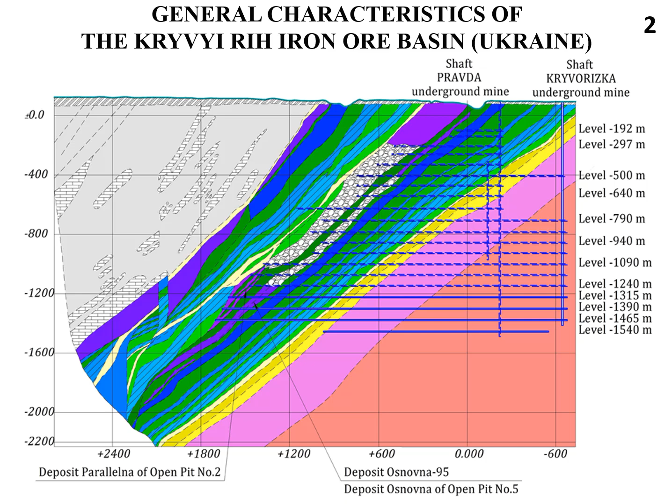Rocks of the hanging wall and footwall are represented by strong, stable martite hornfels with ultimate compression strength of 100 to 130 megapascals and goethite hematite martite hornfels with ultimate compression strength of 70 to 90 megapascals. Physical properties of rocks are given in the table. As is seen from the table, physical and mechanical properties of the rocks are wide in range.

When mining iron ore, over 60% of underground mines of Kryvyi Rih iron ore basin apply a system with the bulk caving of ore and overlying rocks. These mining systems have the following disadvantages: ore losses on the footwall, up to 30 to 50% of the total ore losses; ore dilution, by 3 to 5% more than standard; reduced content of the useful component in the mined ore mass. When the deposit dip is 45 to 60 degrees, application of these mining systems results in about 30 to 40% of ore lost on the footwall.

Increased losses of ore during mining lead to an increase in the specific volume of mining and capital works, preterm mining of levels. In this regard, the scientific and technical task of studying and enhancing the technology of mining ore deposits by the underground method for Kryvyi Rih iron ore basin in the triangle of the footwall, in the dead area, when working out ore deposits with a dip of 45 to 60 degrees to minimize ore losses, is topical.

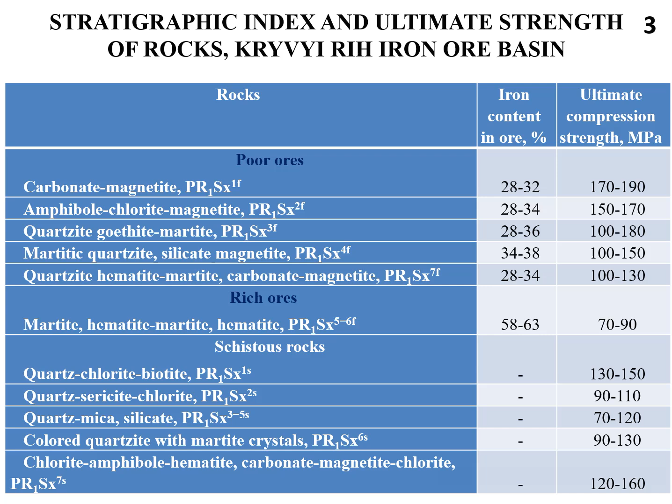One of the solutions for this scientific and technical problem involves developing a method to reduce ore losses in the footwall triangle without increasing the cost of caved ore drawing. The present work aims to study and enhance the technology of mining ore deposits by enhancing the mode of drawing, which will reduce ore losses on the footwall in underground mining at Kryvyi Rih iron ore basin. To achieve this goal, it is necessary to solve the following tasks.

Caved ore drawing from blocks when using systems with the bulk caving of ore is one of the most important production processes. Depending on the accepted method of ore drawing, ore losses and dilution are calculated, and the main parameters of the mining system are determined. This is due to the fact that 30 to 45% of the caved ore reserves is drawn from a block under overlying rocks, while losses in the block make 14 to 16%, and ore dilution is 12 to 20%.

A significant number of publications are devoted to the issue of reducing losses and dilution of caved ore from the stoping block. Scientists of Kryvyi Rih National University, Ukraine, have made a significant contribution concerning ore drawing under caved rocks. The panel enclosed by vertical walls of the ore massif from 4 sides is more favorable in terms of drawing from blocks, as such conditions increase extraction indicators.

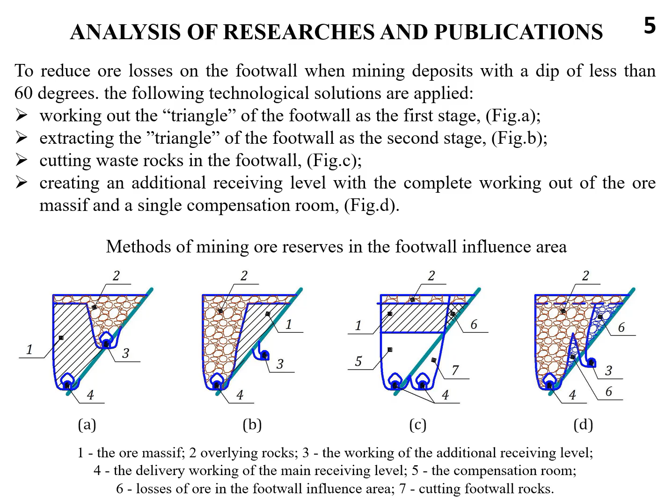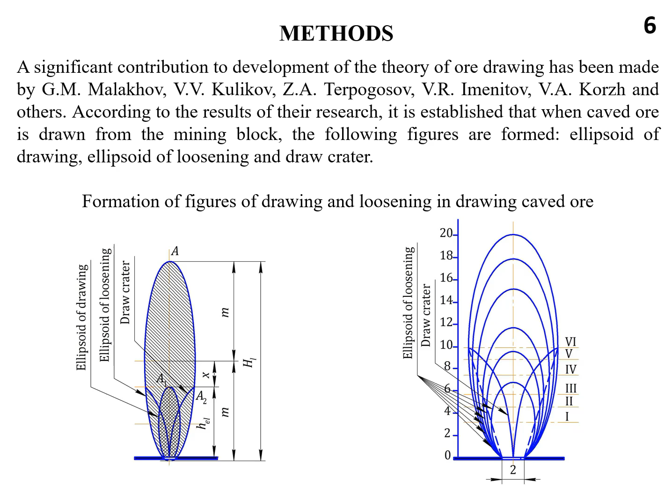To reduce ore losses on the footwall when mining deposits with a dip of less than 60 degrees, the following technological solutions are applied. A significant contribution to development of the theory of ore drawing has been made by Malakhov, Kulikov, Terpogosov, Imenitov, Korzh, and others. According to the results of their research, it is established that when caved ore is drawn from the mining block, the following figures are formed: ellipsoid of drawing, ellipsoid of loosening, and draw crater.

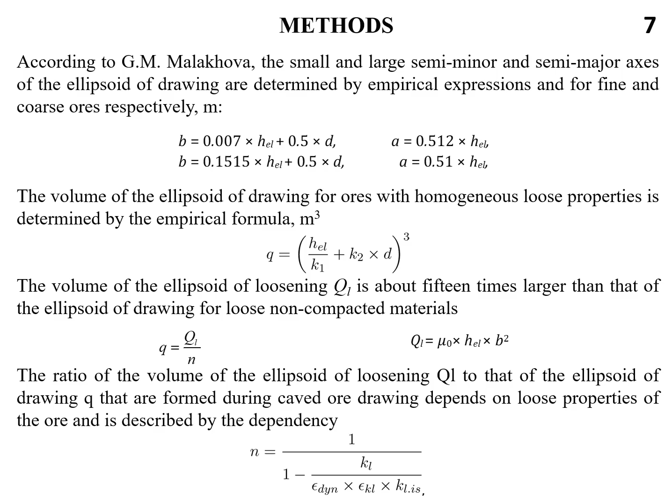The volume of the ellipsoid of loosening QL is about 15 times larger than that of the ellipsoid of drawing for loose non-compacted materials. Therefore, the volume of the ellipsoid of loosening can be determined by the expression. Knowing the ratio of the volume of the ellipsoid of loosening to that of drawing, the latter can be determined according to the expression. Laboratory studies enable establishing that the figure of drawing changes depending on the surface inclination angle.

The results of studying changes in ore drawing angles depending on the surface inclination, distances between the draw point and the inclined surface and the width of the caved layer in the lower and upper parts of the triangle of the footwall are given in table.

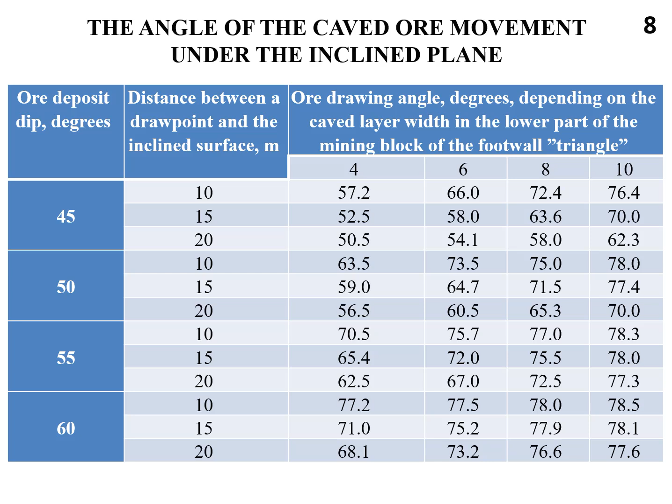Based on the results of the calculations performed, dependencies of the angle of the caved ore flow under the inclined plane on the angle of the ore deposit dip and the distance between a draw point and the inclined surface can be built. The graphs in figure enable the conclusion that an increase in the ore deposit dip angle results in an increased angle of ore drawing under the inclined plane.

Thus, an increase in the deposit dip from 45 to 60 degrees leads to increases of the angle of drawing from 57.2 to 77.2 at the distance of 10 m between a draw point and the inclined surface. When the distance between a draw point and the inclined surface increases from 10 to 20 m at the ore deposit dip of 60 degrees, the angle of ore drawing decreases from 77.2 to 68.1 degrees.

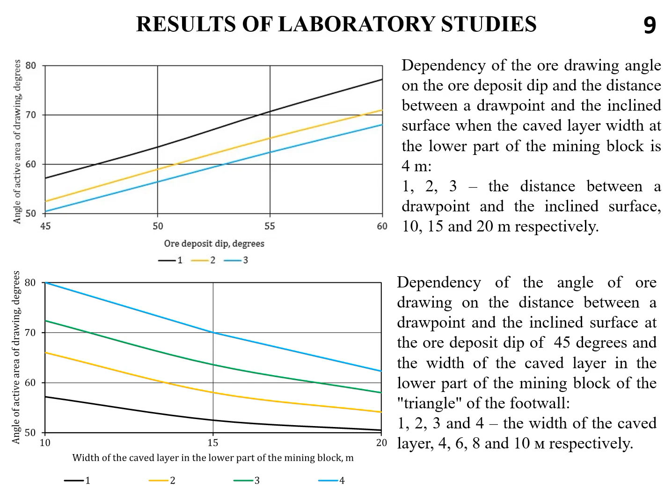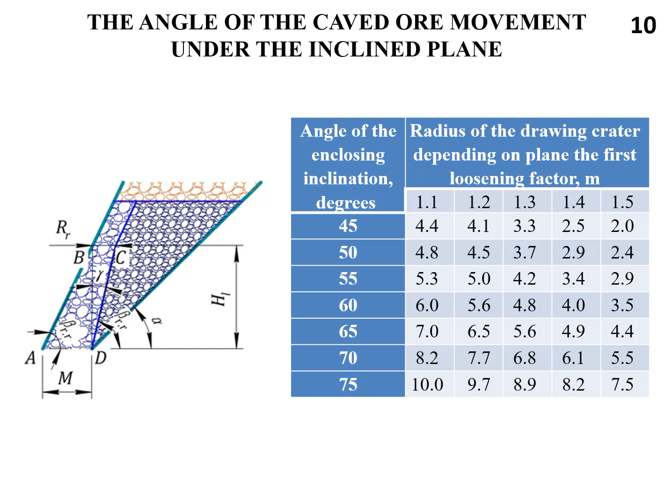Let us consider how the angle of inclination of the enclosing plane and the angle of caved ore drawing impact the draw crater radius. The calculation scheme is given in figure. Considering the right triangle ABC and knowing the width of the ore layer under breaking, the angle of inclination of the enclosing plane, the radius of the draw crater R, triangle BCD, is determined. Thus, according to the known values from the theory of drawing caved ore under the country rocks, the radius of the draw crater is determined. The results of the calculations are given in table.

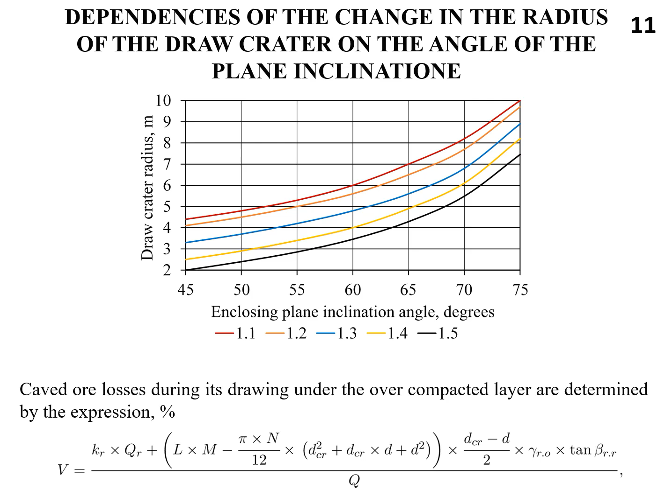As is seen in figure, an increase in the angle of plane inclination leads to the increase of the draw crater radius from 2.0 to 7.5 meters at the first loosening factor of 1.5. A decrease in the first loosening factor from 1.5 to 1.1 results in the increase of the draw crater radius from 2.0 to 7.5 meters to 4.4 to 10.0 meters. Thus, by changing the angle of plane inclination and increasing the width of the active drawing area, it is possible to reduce ore losses on the footwall.

To minimize ore losses and dilution, it is advisable to locate the draw point in the block sill at a distance that provides formation of the 20 to 25 meters high ellipsoid of drawing. Thus, when applying the sublevel forced caving system using an overcompacted ore layer, it is possible to significantly reduce ore losses and dilution to enhance extraction of ore mass without additional costs. With the 22 meters thick overcompacted layer, ore losses and dilution can be reduced from the actual 14 and 16% to 10 and 9% respectively.

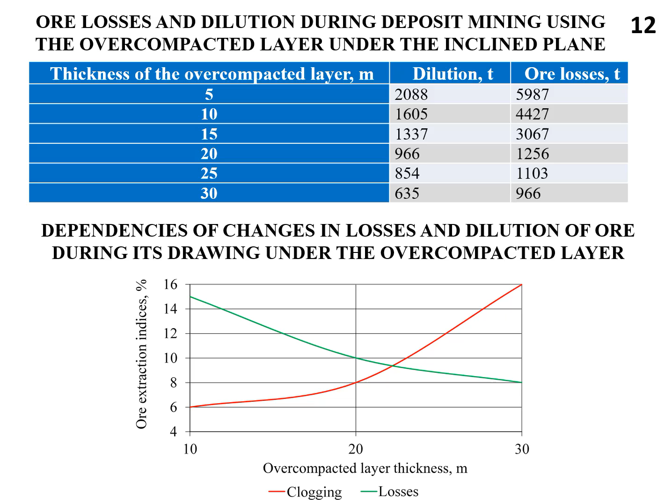The results of the studies performed enable proving that the width of the active drawing area is impacted by not only rock pressure, but also the ore deposit dip angle and the enclosing surface represented by the hanging wall or created by gradual ore breaking. Thus, losses of ore on the footwall can be reduced by changing the angle of inclination of the plane and increasing the width of the active drawing area. It is established for the first time that an increase in the thickness of the overcompacted ore layer leads to increases in the semi-minor axis of the ellipsoid of drawing and the width of the active area, which results in decreased losses and dilution of ore during its drawing from the stoping block.

It is established that in order to minimize ore losses and dilution when using level mining systems, the draw point should be located in the block sill at a distance that provides formation of the 20 to 25 meters high ellipsoid of drawing. Using an overcompacted ore layer can significantly reduce ore losses and dilution and enhance extraction of ore mass without additional costs. Thus, the 22 meters thick overcompacted layer enables this.